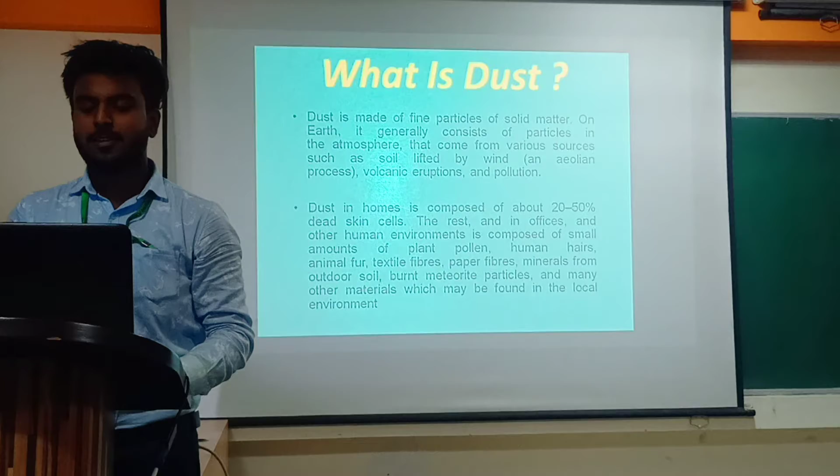At first we have to know what is dust. Dust is basically made of fine particles of solid matter. On Earth, it generally consists of particles in the atmosphere that come from various sources such as soil lifted by wind, an aeolian process, volcanic eruptions, and pollution.

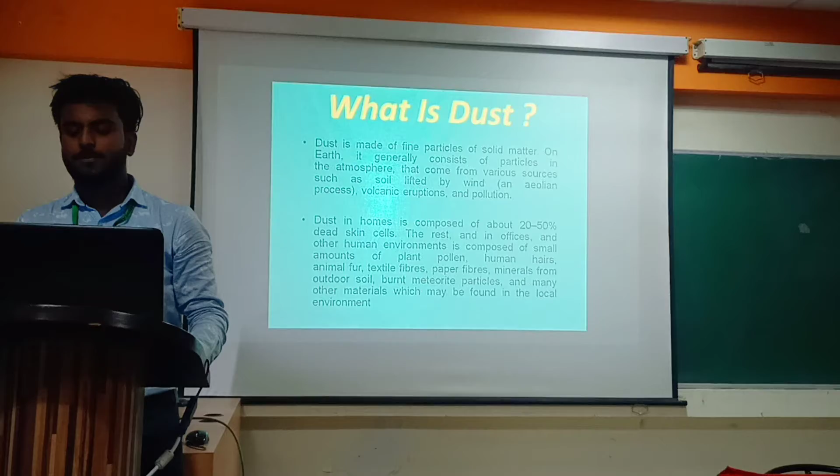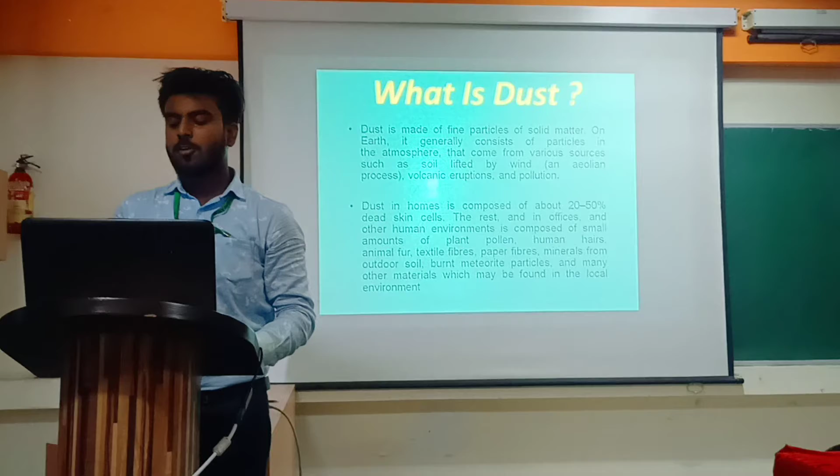Dust in homes is composed of about 20 to 50% dead skin cells. The rest, in offices and other human environments, is composed of small amounts of plant pollen, human hairs, animal furs, textile fibers, paper fibers, minerals from outdoor soil, burnt meteorite particles, and many other materials which may be found in the local environment.

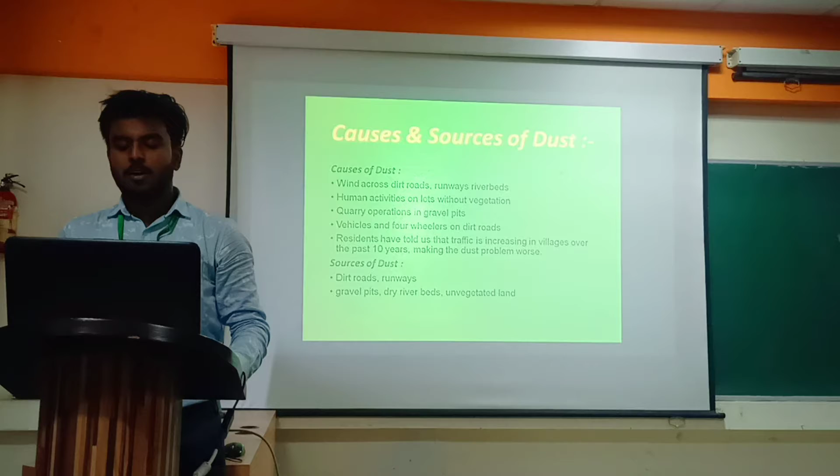Now, causes and sources of dust. So what are the causes of dust? Wind across dirt roads, runways riverbeds, human activities on lots without vegetation, quarry operations in gravel pits, and vehicles and four-wheelers on dirt roads.

Vehicle and residents have told us that traffic is increasing in villages over the past 10 years, making the dust problem worse. Now, sources of dust: dirt roads, runways, gravel pits, dry river beds, and unvegetated lands.

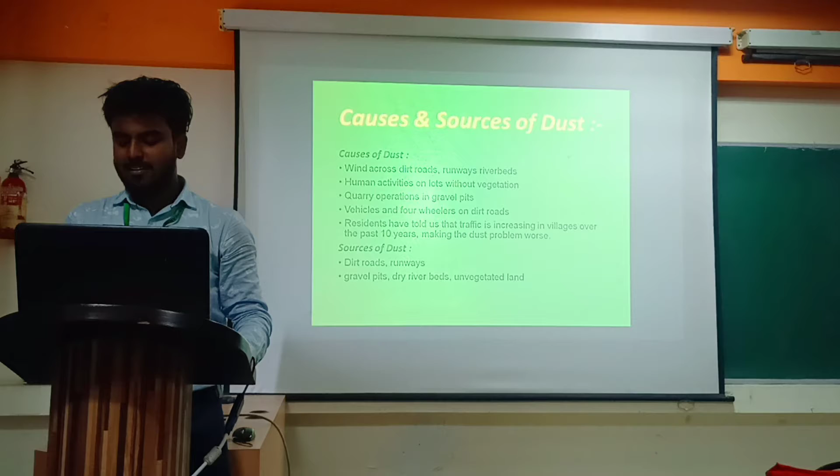So what are the problems existing from dust? The dust and potential health risk. Dust may cause health problems in the villages. Dust aggravates existing heart and lung diseases and can damage lung tissue.

Children, seniors, and people with asthma and other respiratory or heart conditions are more susceptible to health problems from breathing in dust. There is stronger evidence of a long-term health effect from PM 2.5 captured particles, which includes ultrafine particles.

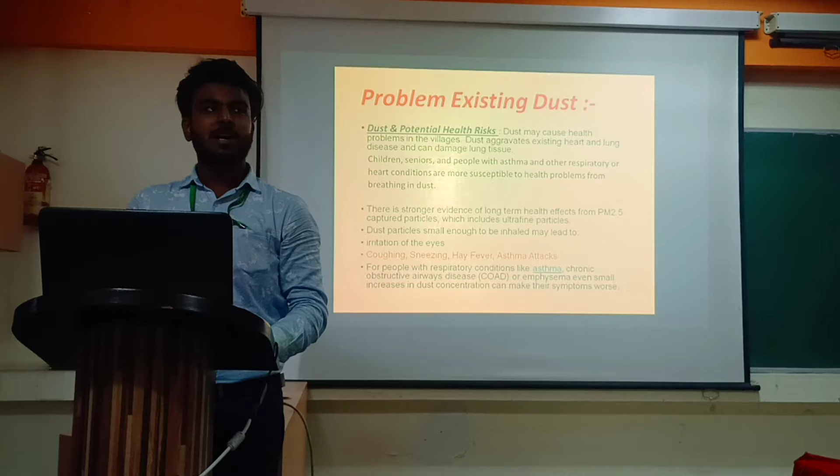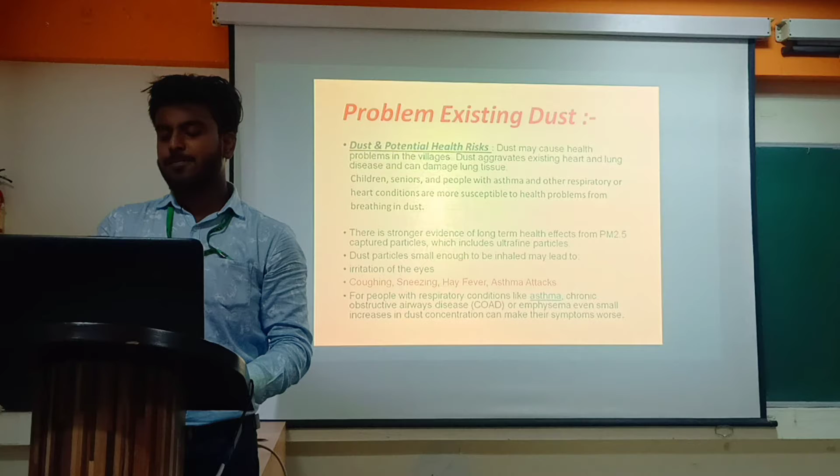Dust particles small enough to be inhaled may lead to irritation of the eyes, coughing, sneezing, hay fever, and asthma attacks. For people with respiratory conditions like asthma, chronic obstructive airways disease (known as COAD), or emphysema, even small increases in dust concentration can make their symptoms worse.

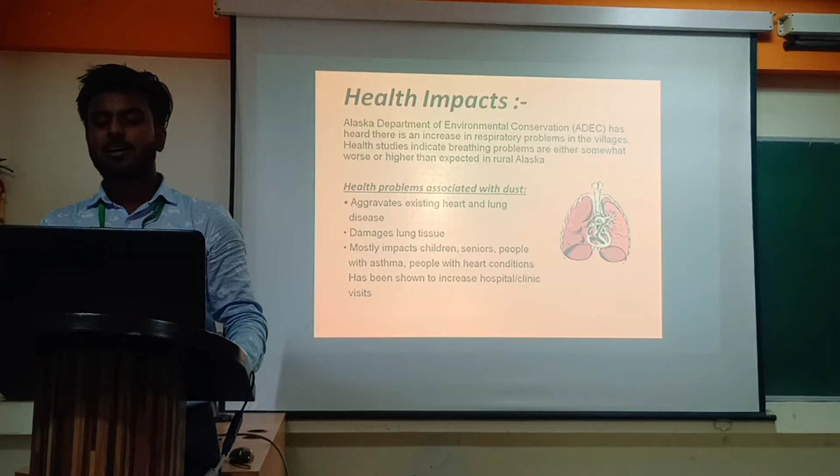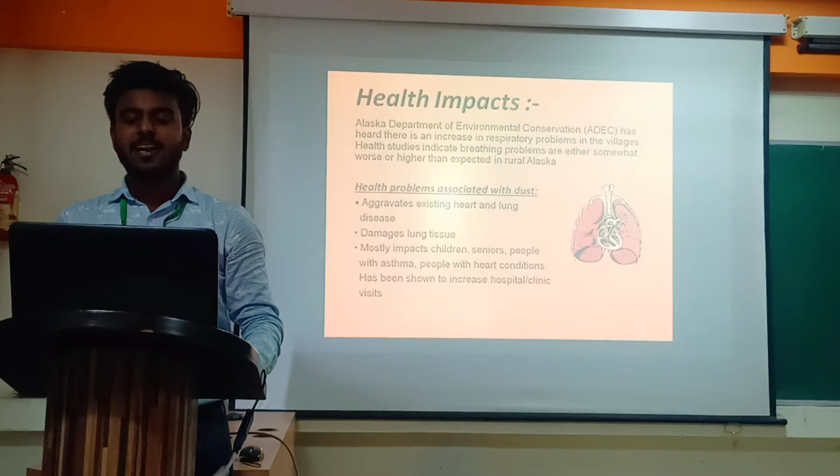Now, what are the health impacts of dust? The Alaska Department of Environmental Conservation, known as ADEC, has heard there is an increase in respiratory problems in the villages. Health studies indicate breathing problems are either somewhat worse or higher than expected in rural Alaska.

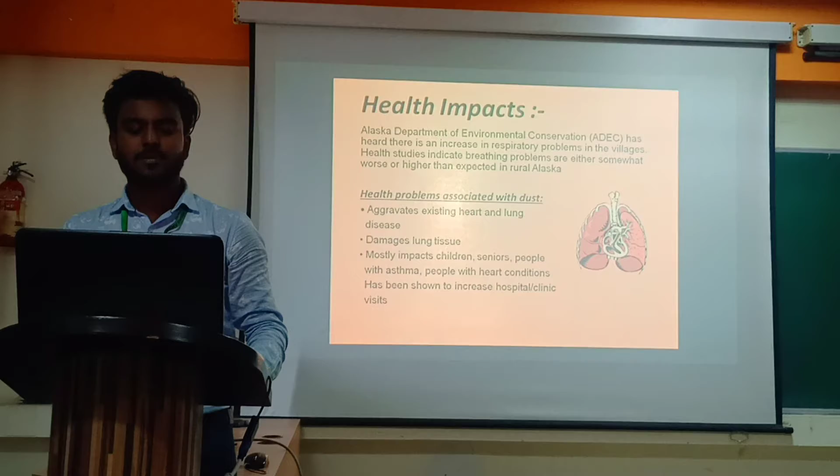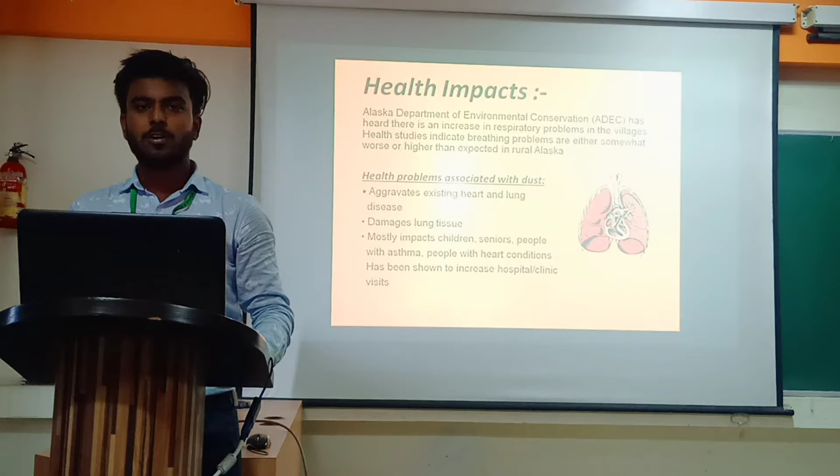Health problems associated with dust: aggravates existing heart and lung diseases, damages lung tissue, mostly impacts children, seniors, people with asthma, and people with heart conditions. It has been shown to increase hospital and clinic visits.

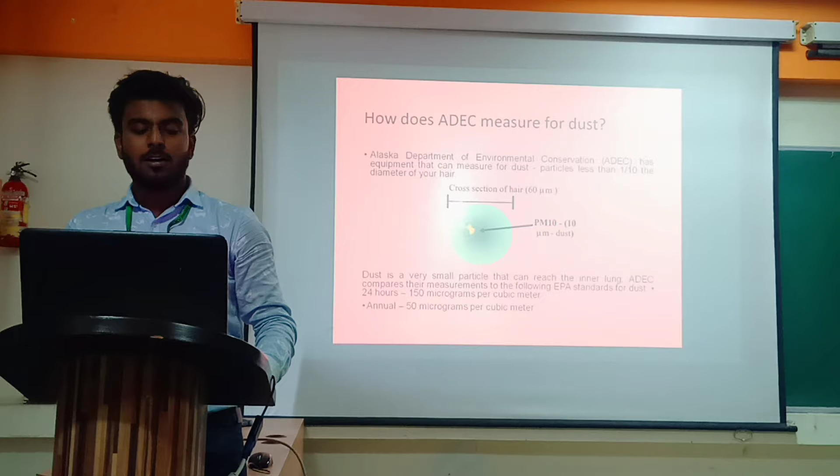How does ADEC measure for dust? ADEC, known as Alaska Department of Environmental Conservation, has equipment that can measure for dust: particles less than 1/10th the diameter of your hair.

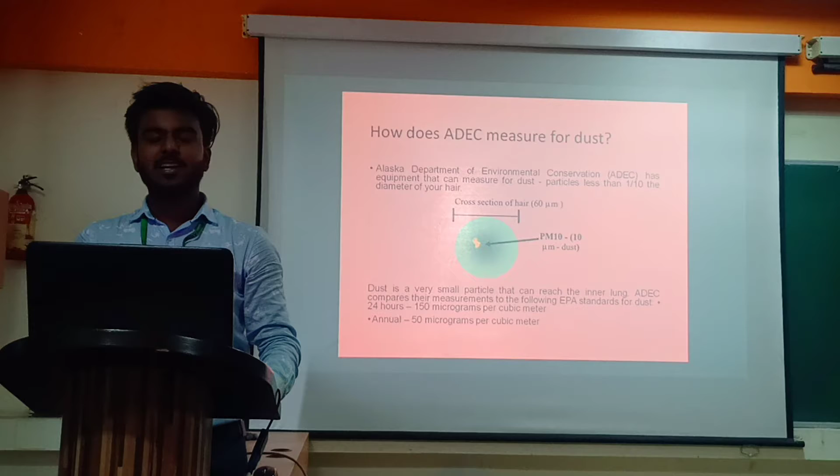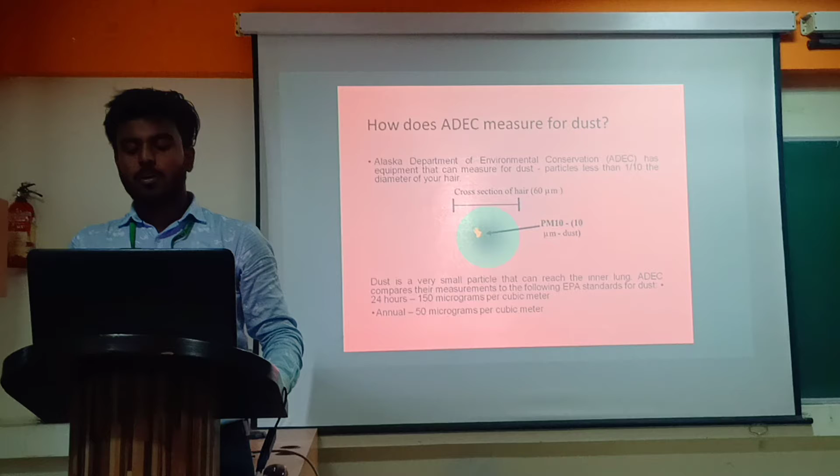Dust is very small particles that can reach the inner lung. ADEC compares their measurements to the following EPA standards for dust: over 24 hours, 150 micrograms per cubic meter of dust entering our lungs; on an annual basis, 50 micrograms per cubic meter of dust.

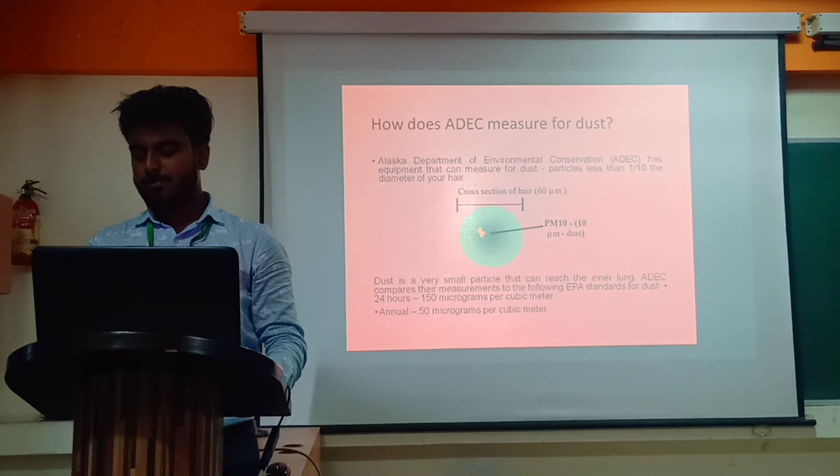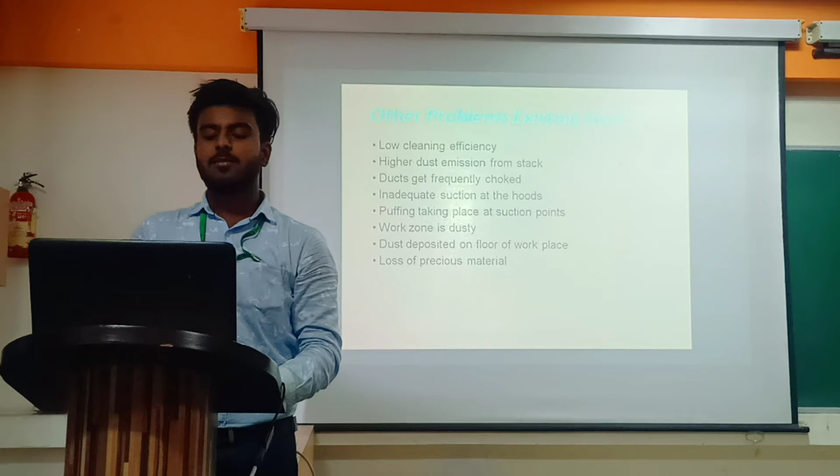Now the other problems existing from dust: low cleaning efficiency, higher dust emission from the stack, ducts get frequently choked, inadequate suction at the hoods, puffing taking place at the suction points, work zone is dusty, dust deposited on the floor of the workplace, and loss of precious material.

Now Asif will continue the other part of the debate.

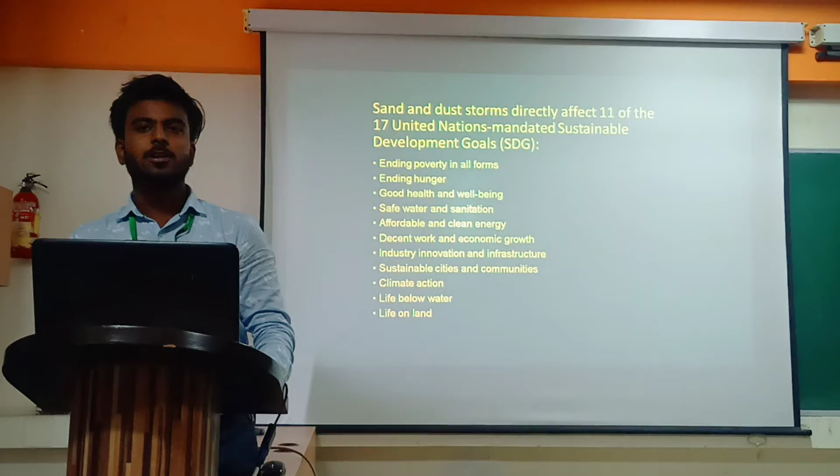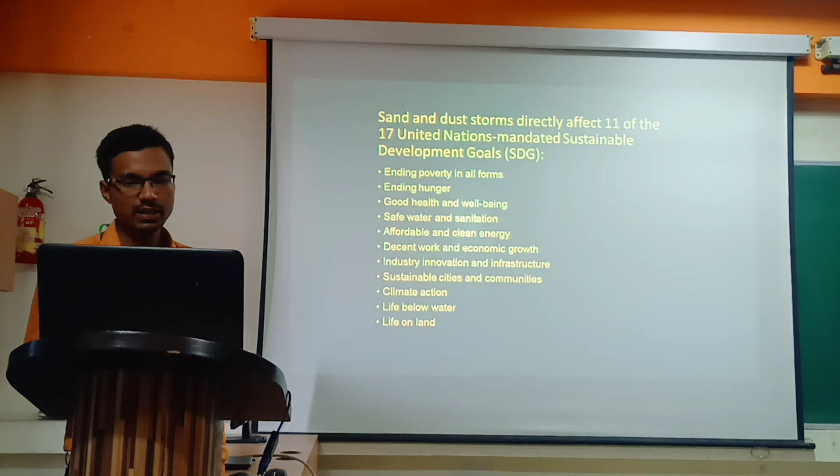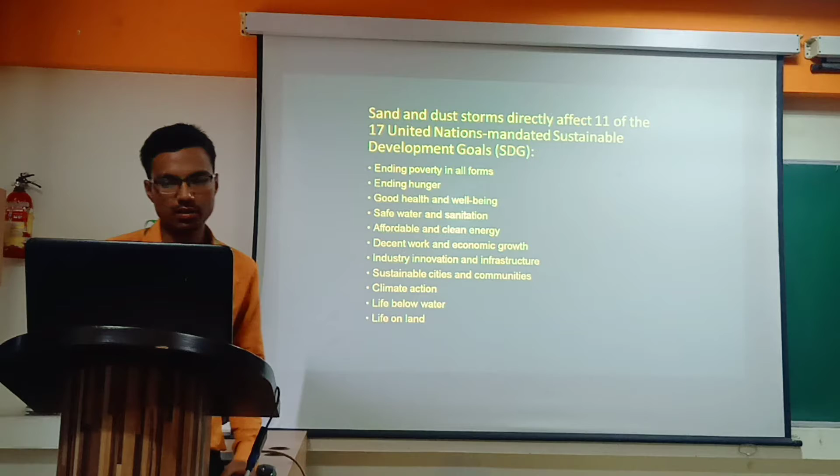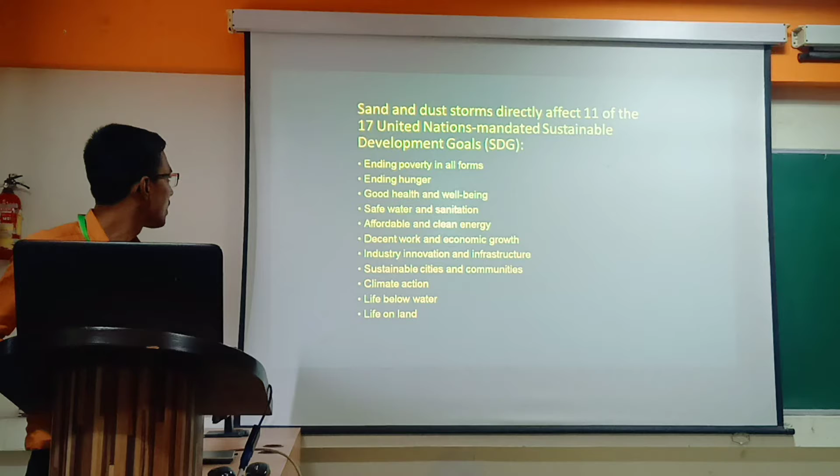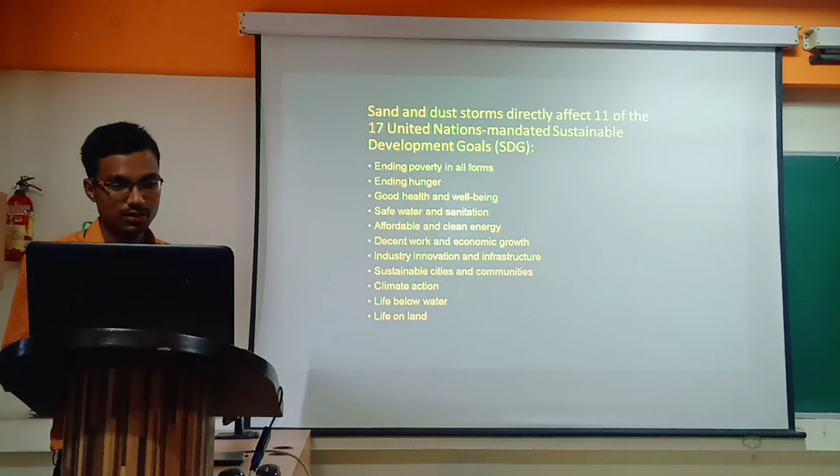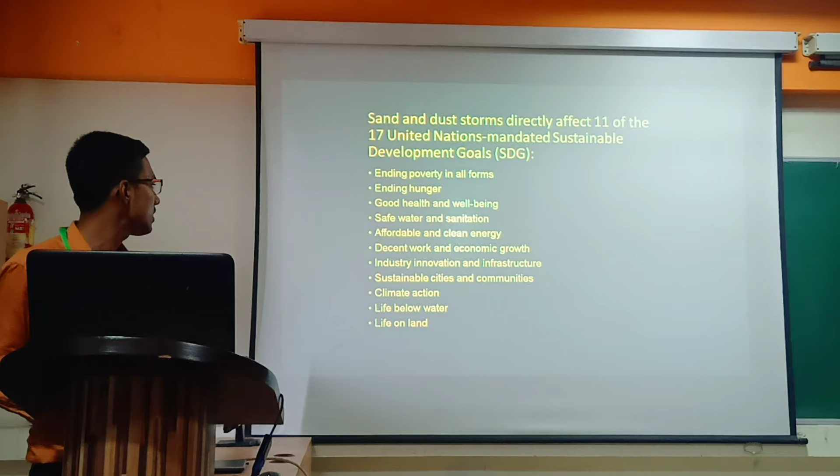The 11 goals are: ending poverty in all forms, ending hunger, good health and well-being, safe water and sanitation, affordable and clean energy, decent work and economic growth, industrial innovation and infrastructure, sustainable cities and communities, climate action, life below water, and life on land.

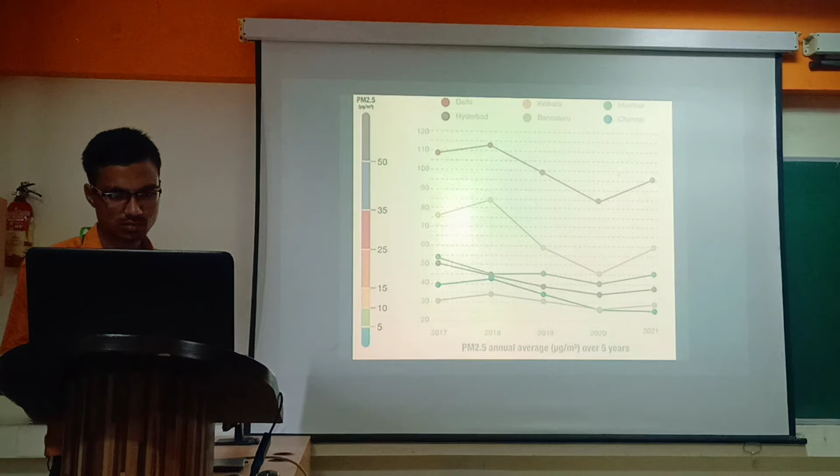This is a survey from the last 5 years which shows which cities have the maximum amount of pollution. In this survey or graph, you can see that Delhi has the maximum pollution.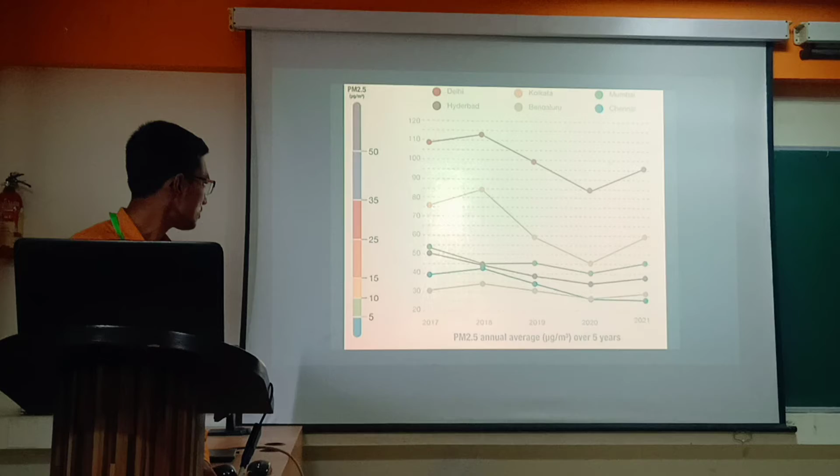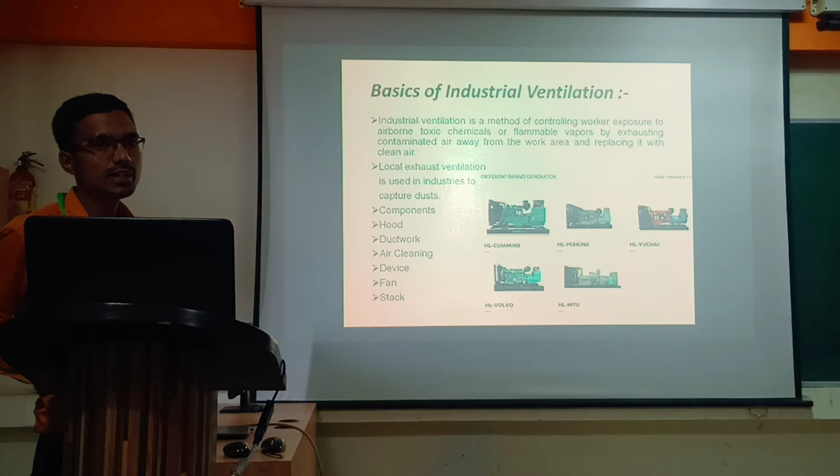To control dust, you can use various types of ventilation, but here I can explain the basics of industrial ventilation. Industrial ventilation is a method of controlling worker exposure to airborne toxic chemicals or flammable vapors by exhausting contaminated air away from the work area and replacing it with clean air.

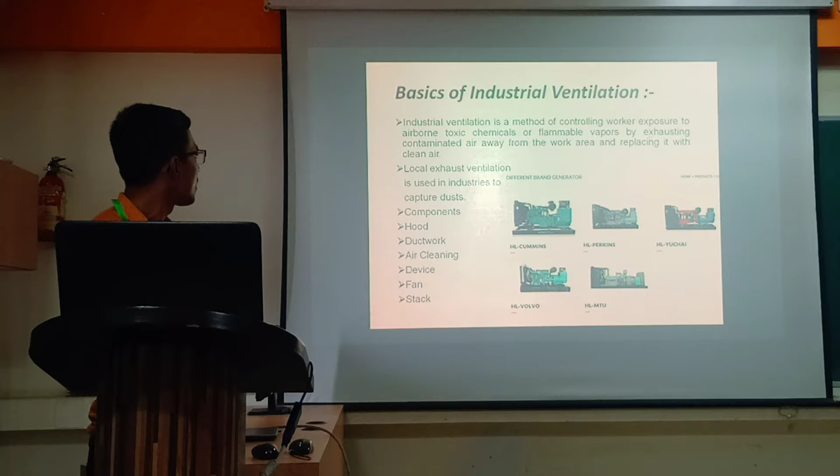Local exhaust ventilation is used in industry to capture dust. Components include hood, ductwork, air cleaning device, fan, and stack.

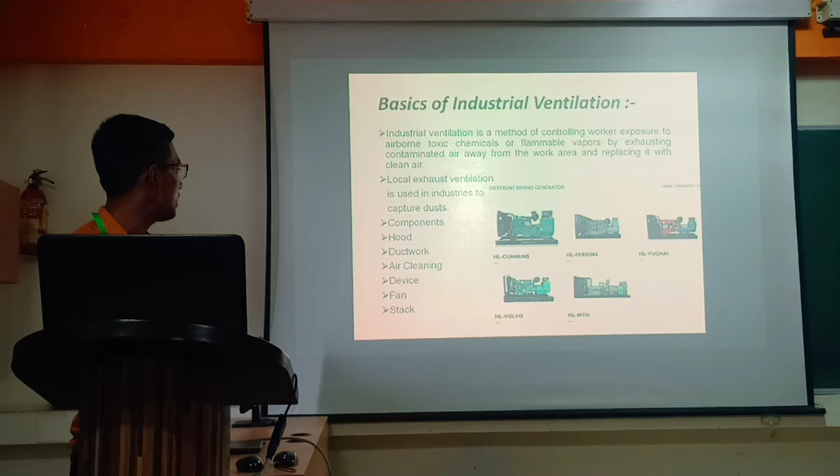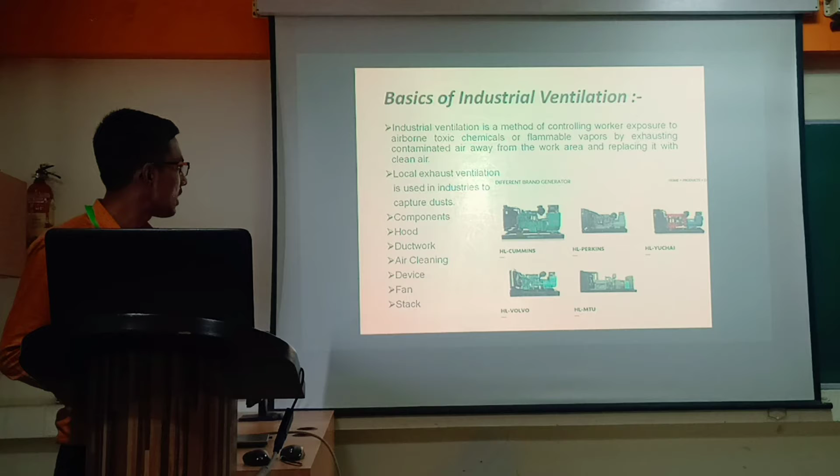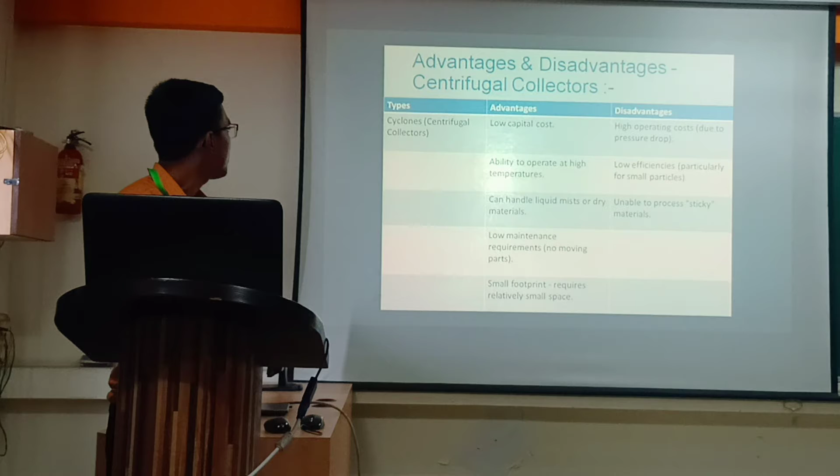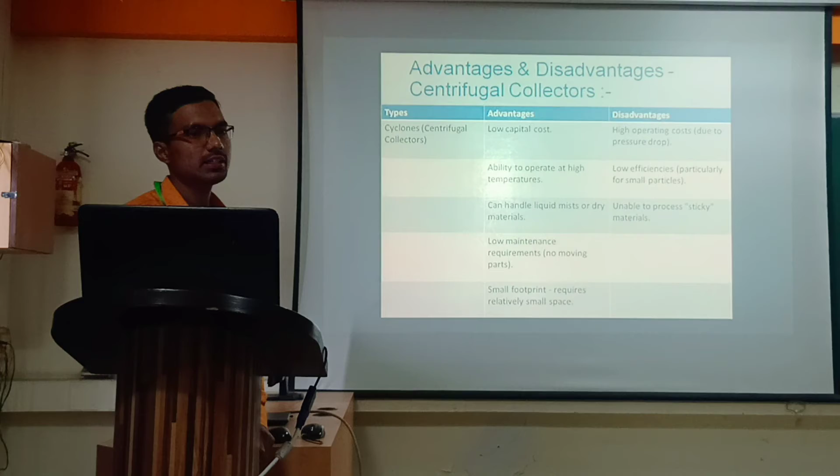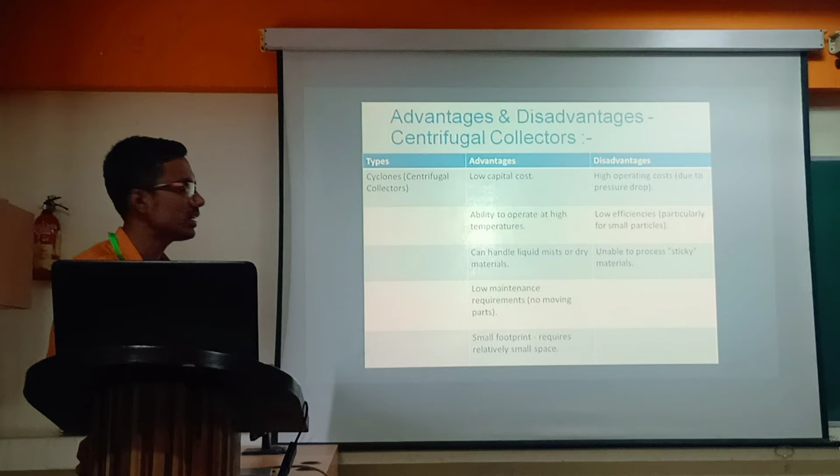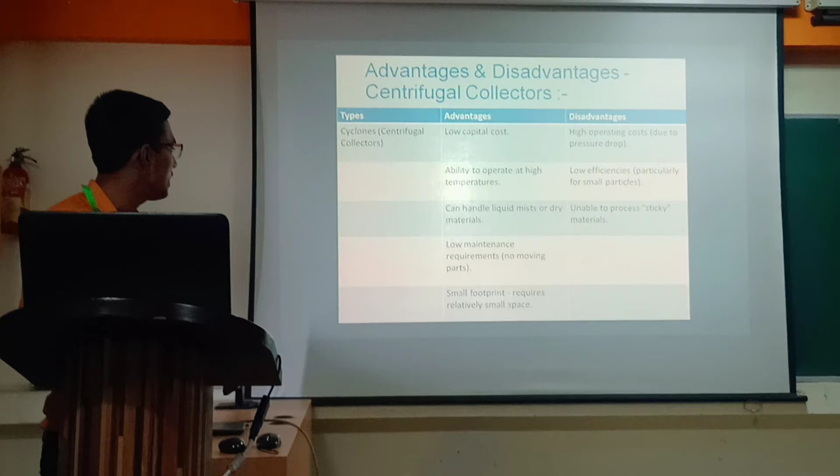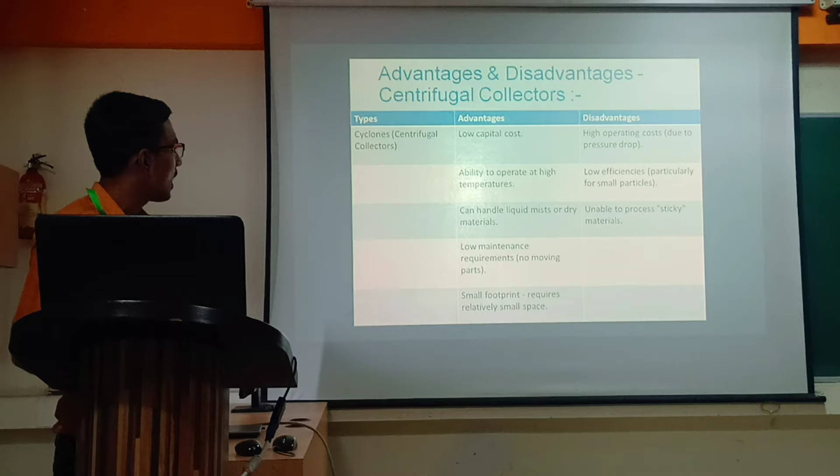Every machine has its advantages and disadvantages, and this machine also. Centrifugal collectors - advantages: low capital cost, ability to operate at high temperature, can handle liquid mist or dry material, low maintenance requirement, no moving parts, small footprint, requires relatively small space. In the same way, the disadvantages of this centrifugal collector are high operating cost due to pressure drop, low efficiency particularly for small particles, and unable to process sticky materials.

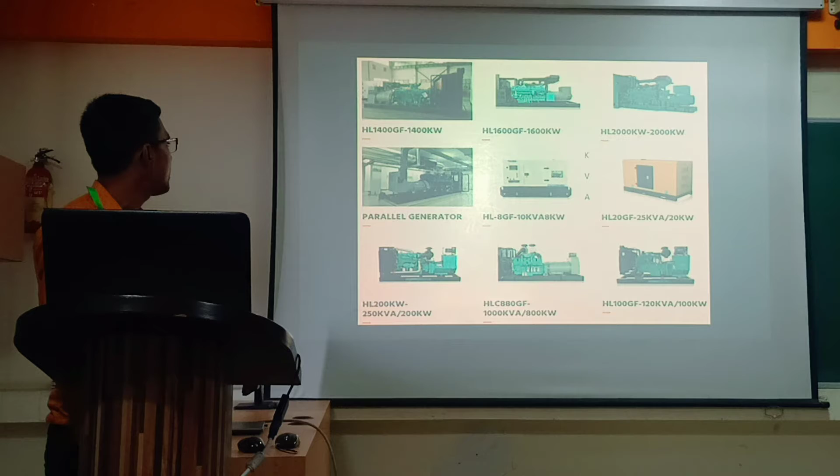These are some generators or machines which we can use to control or measure dust control.

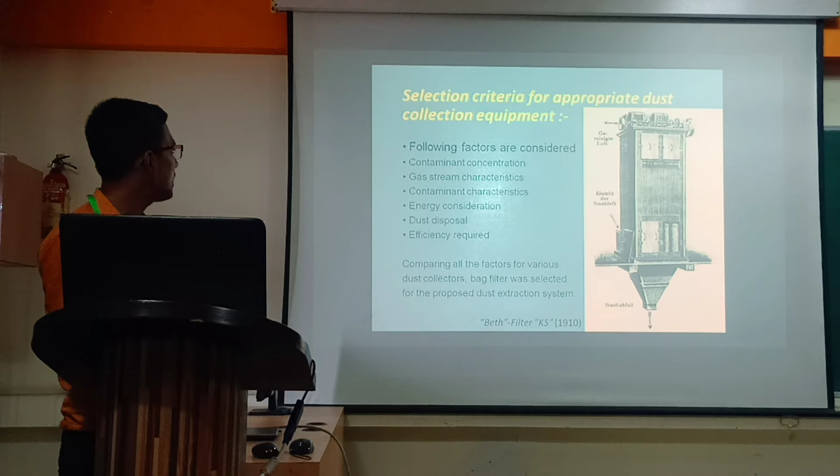Selection criteria for appropriate dust collection equipment: the following factors are considered - contaminant concentration, gas stream characteristics, energy consideration, contaminant characteristics, and dust disposal efficiency required.

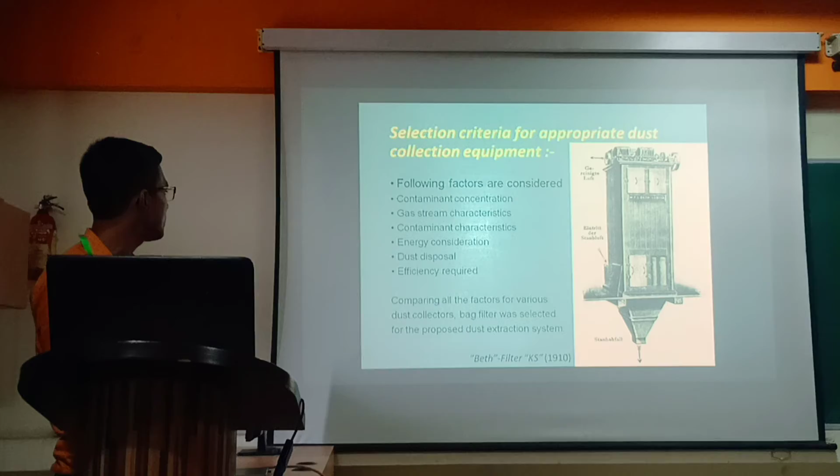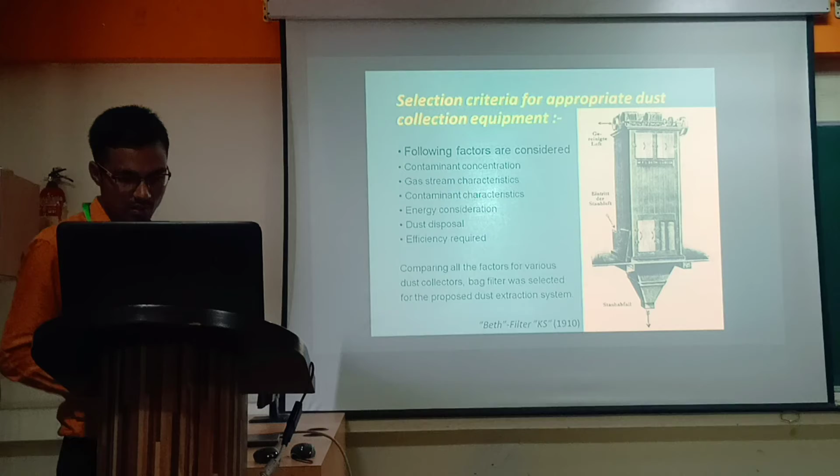Comparing all the factors from various dust collectors, bag filter was selected for the proposed dust extraction system. This is a diagram for that filter. And the rest part will be explained by my friend Surajit. Thank you.

Good afternoon, everyone. So I start the next part: design of bag filter with dust exhausting system.

Dust is generated in the work zone during material transfer by conveyor belt. As compared to the present dust control system, a better and more efficient dust exhausting system is designed for conveyor belt ventilation.

Changes made: review of suction air quantity based on ACGIH norms, design of a number of suction hoods and their location, design of a bag house filter, and design of stack of suitable height.

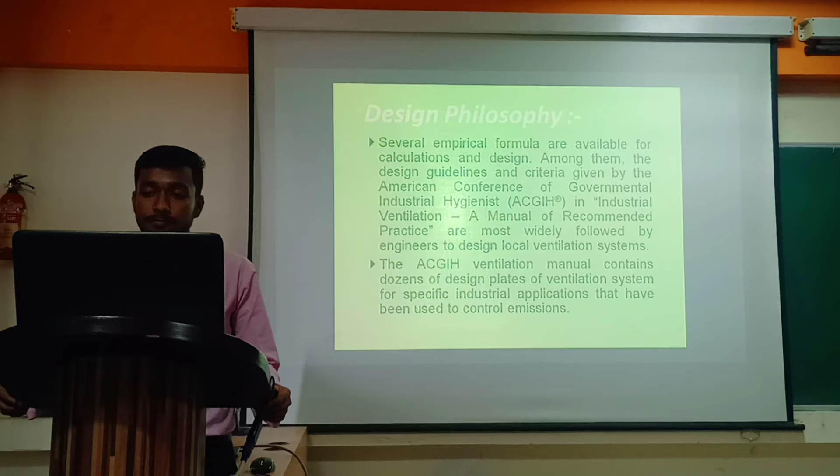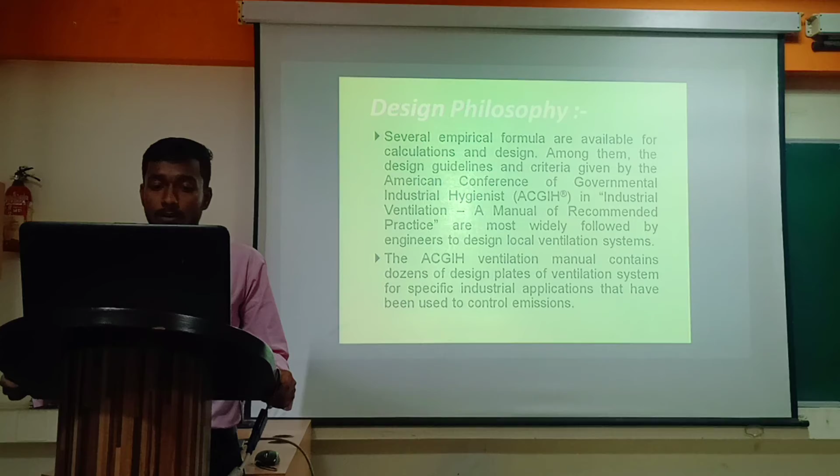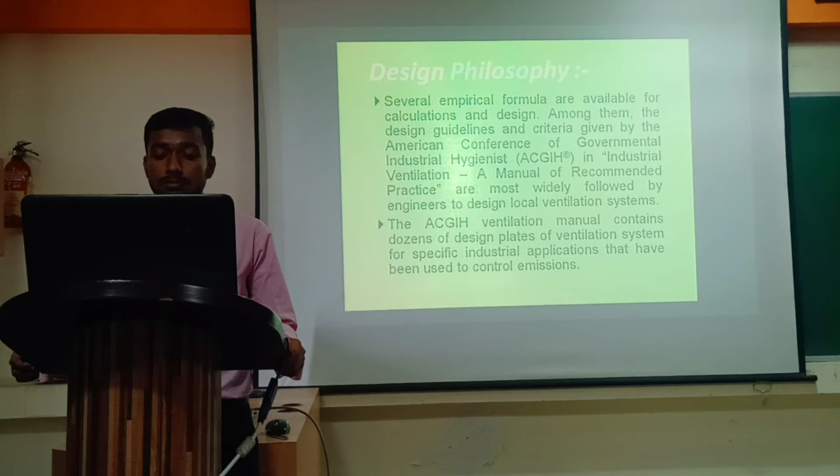Design philosophy: several empirical formulas are available for calculation and design. Among them, the design guidelines and criteria given by the American Conference of Governmental Industrial Hygienists, called ACGIH, in industrial ventilation - a manual of recommended practice - are most widely followed by engineers to design local ventilation systems. The ACGIH ventilation manual contains dozens of design plates of ventilation systems for specific industrial applications that have been used to control emissions.

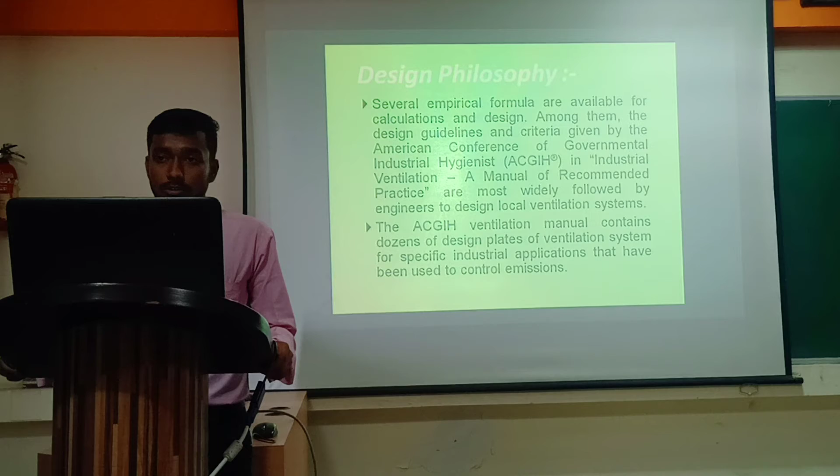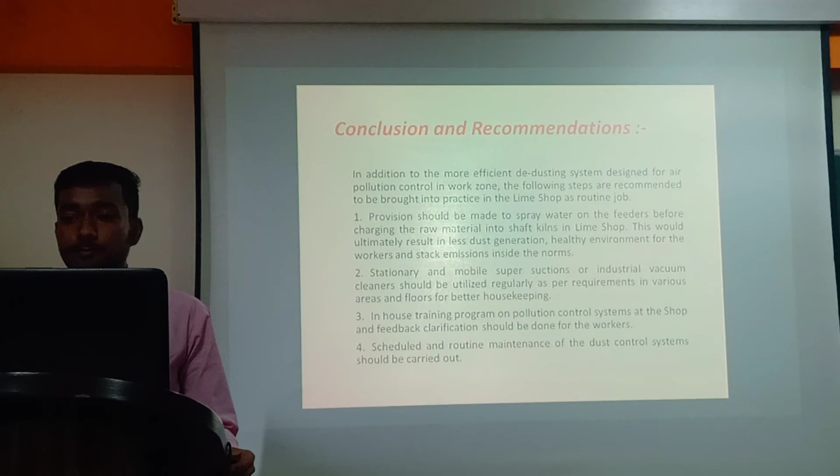Conclusion and recommendation: in addition to the more efficient dedusting system designed for air pollution control in the work zone, the following steps are recommended to be brought into practice in the Lime Shop as routine job.

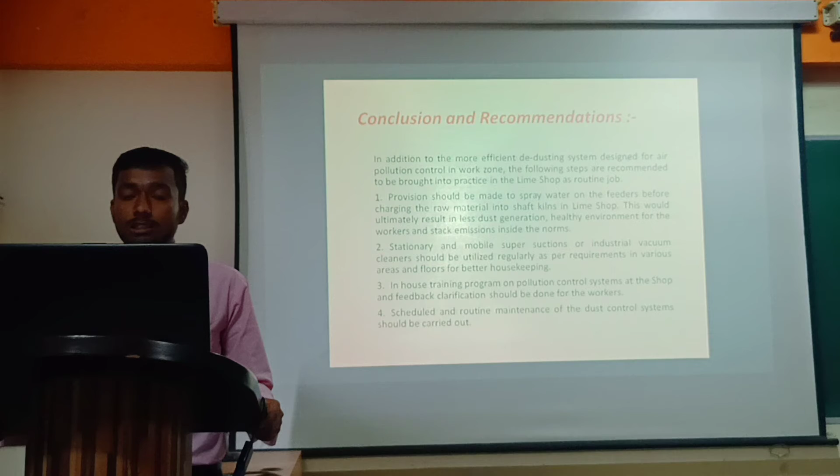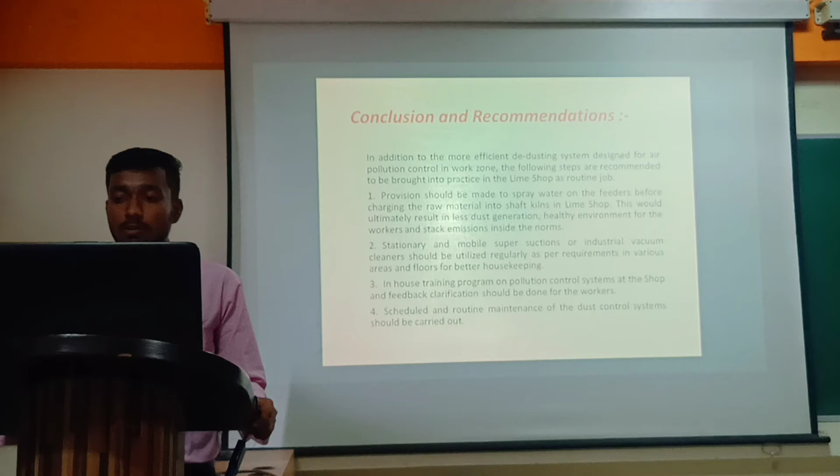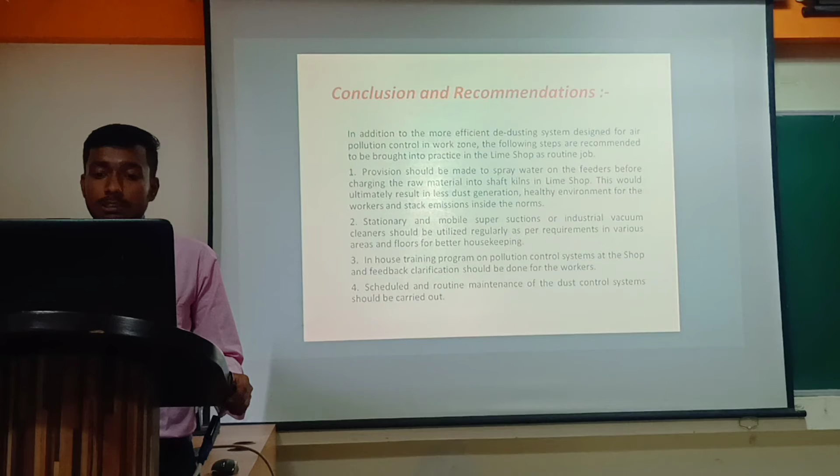First, provision should be made to spray water on the feeders before charging the raw materials into shaft kilns in Lime Shop. This would ultimately result in less dust generation, a healthy environment for the workers, and stack emissions inside the norms.

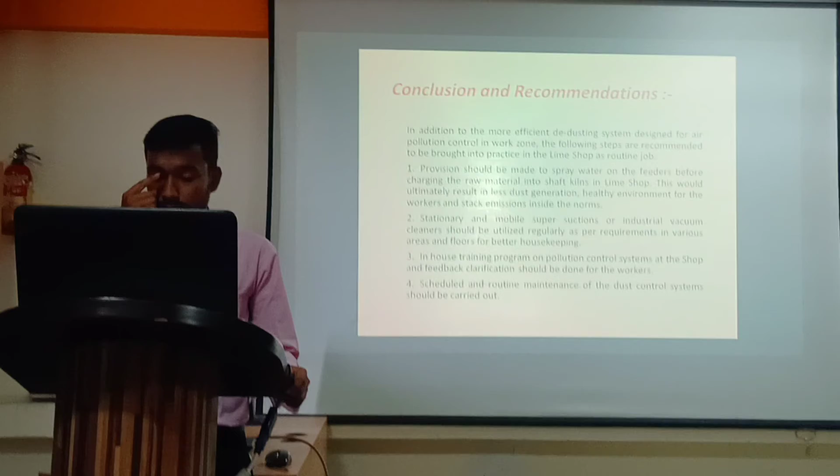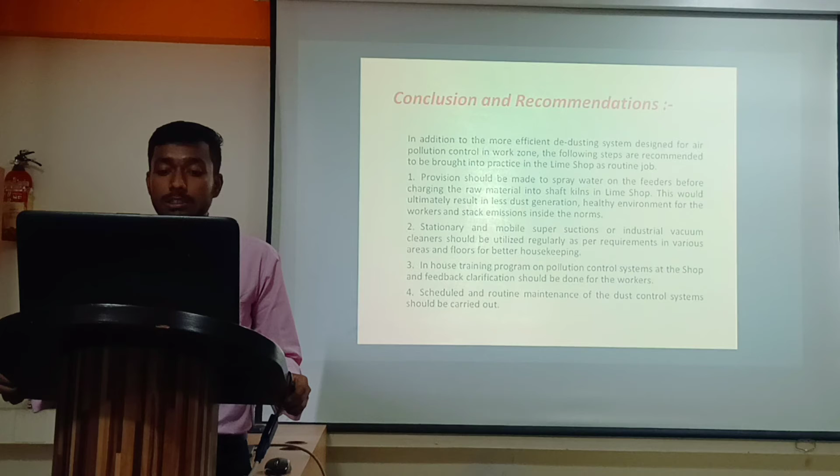Second, stationary and mobile super suctions or industrial vacuum cleaners should be utilized regularly as per requirements in various areas and floors for better housekeeping.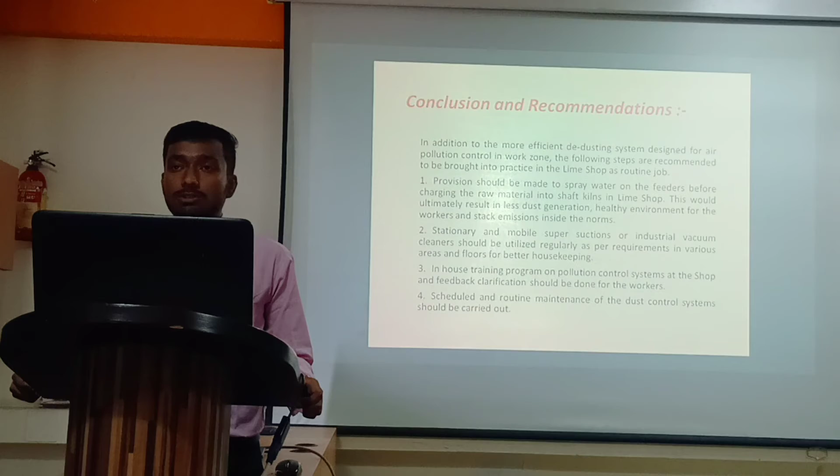Third, an in-house training program on pollution control systems at the shop and feedback clarification should be done for the workers. Fourth, scheduled and routine maintenance of the dust control system should be carried out.

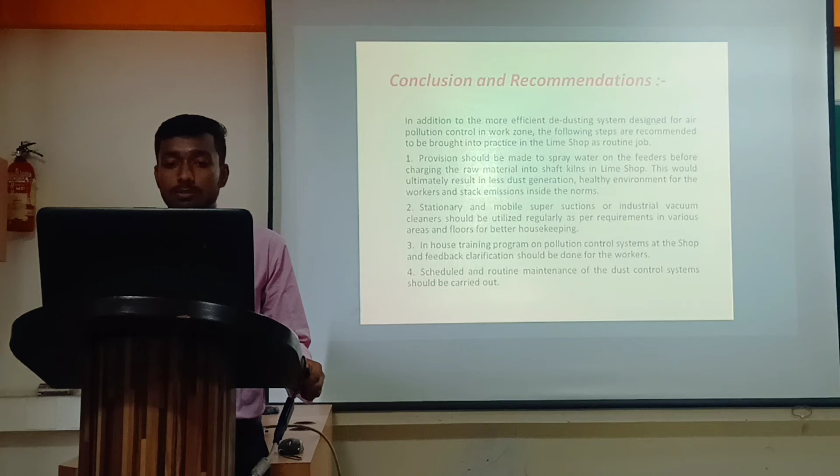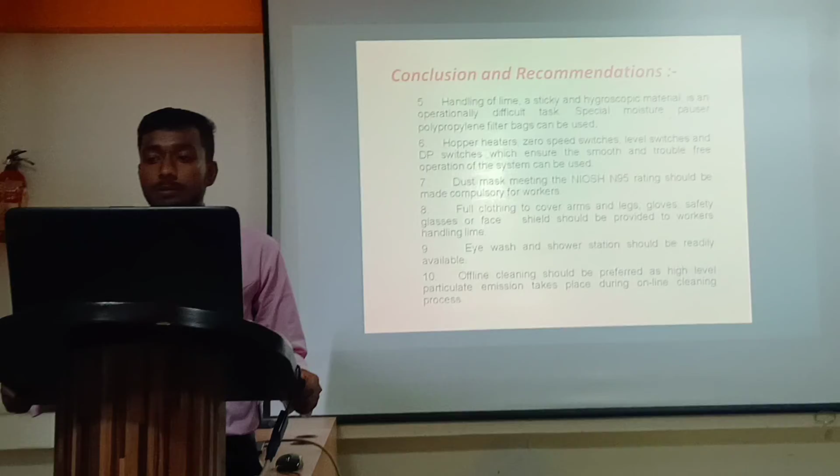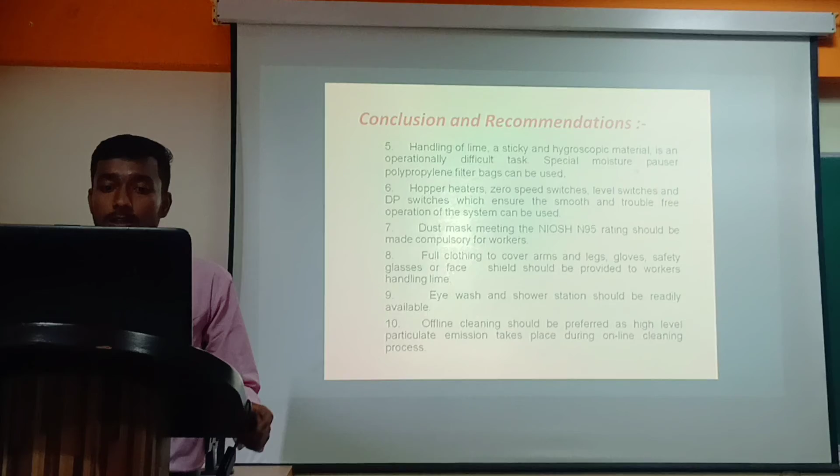Fifth, handling of lime, sticky and hygroscopic materials is operationally a difficult task. Special moisture-resistant polypropylene filter bags can be used.

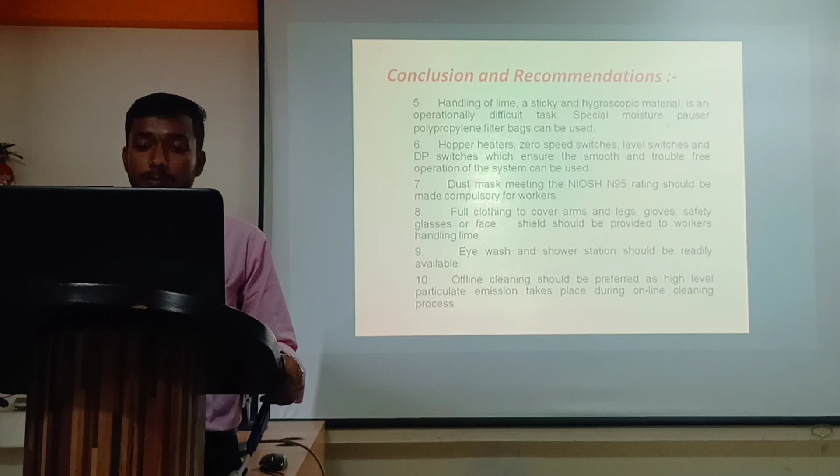Sixth, hopper heaters, zero speed switch, level switch and DP switch, which ensure smooth and trouble-free operation of the system, can be used. Seventh, dust masks meeting the NIOSH N95 rating should be made compulsory for workers.

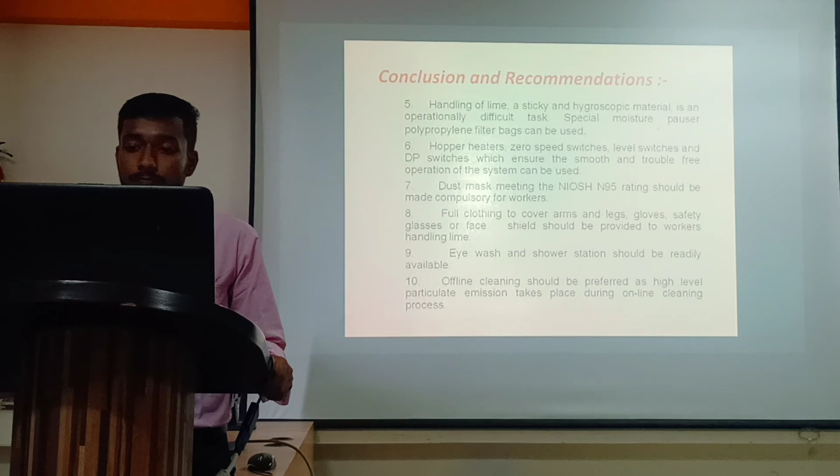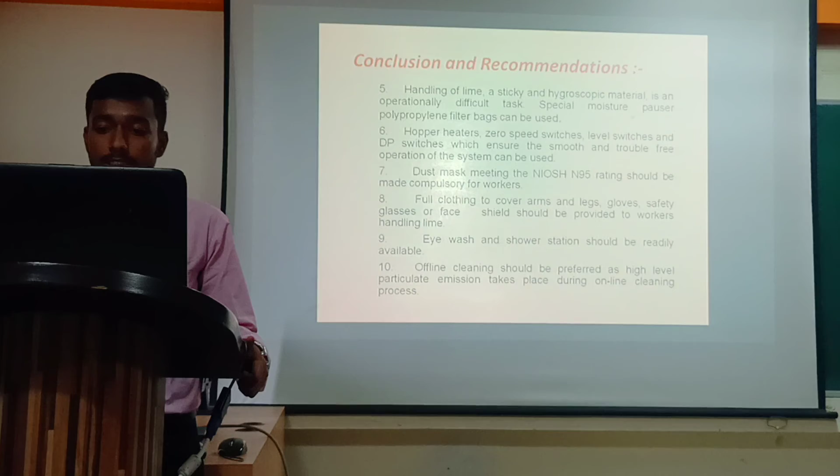Eighth, full clothing to cover arms, legs, gloves, safety glasses or face shields should be provided to workers handling the lime. Ninth, eye wash and shower stations should be readily available.

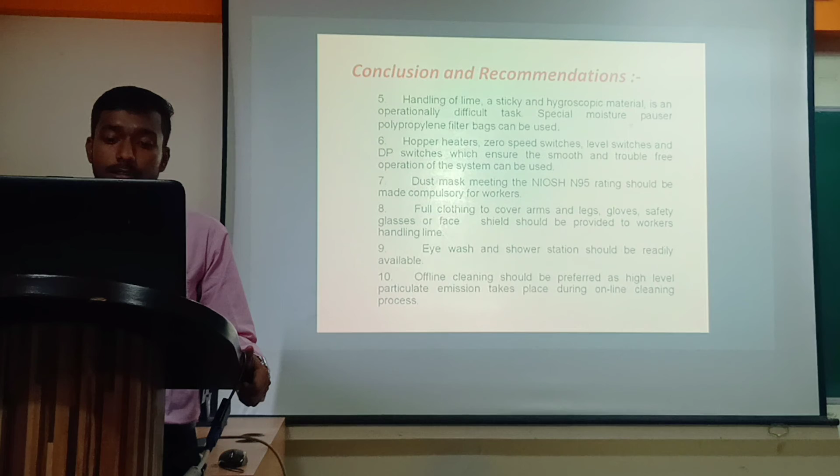And tenth, offline cleaning should be preferred, as high level particulate emissions take place during online cleaning process.